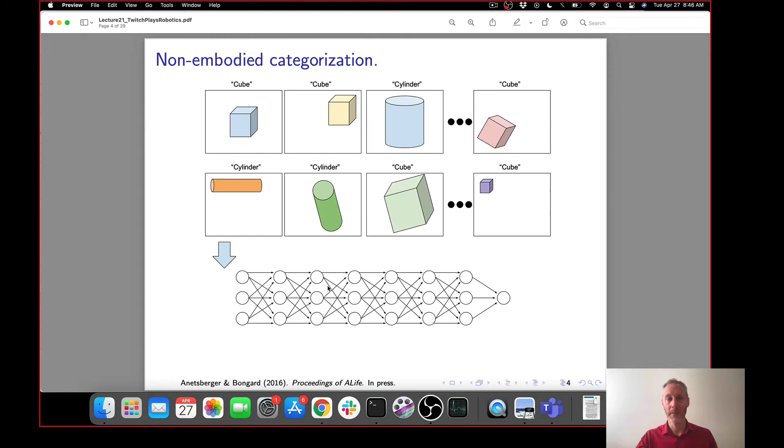Nobody knows, and this is another reason why this lecture is included in the open challenges in robotics. I'm going to skip over a couple slides here. How do we go about solving the symbol grounding problem? Well, there are hints, a growing number of hints, coming from our understanding of how humans ground the symbols of language in our everyday experience.

We do not learn language by reading dictionaries of dictionaries. However we go about learning language, there is some deep connection between the language we're learning and its relationship with the real world. But what is that relationship exactly? Let me show you some hints that suggest what that relationship between language and physical experience is.

I think we mentioned the motor strip before. Can someone just type into chat, yes or no? Did we talk about the motor homunculus here, the motor strip? I talk about it from time to time in lecture. I don't remember if we've talked about it here. Does anybody remember a discussion about the motor strip?

I don't see anything in chat, so I'm going to assume we haven't talked about the motor strip before. The part of your brain that would be covered if you're wearing earmuffs, right across here, is known as the motor strip.

It's very interesting. If you put someone in an fMRI scanner and focus the scan on this part of the brain, then touch someone's index finger, a particular part of the motor strip will light up. If you touch a nearby body part like the middle finger, a nearby part of the motor strip will light up. If you start by touching parts of the subject's body from the head down to their toes as they're in the scanner, you will notice a series of lights lighting up along the motor strip.

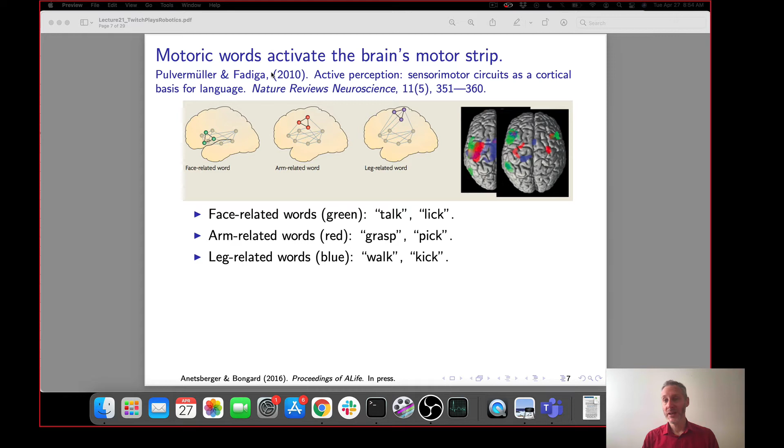This is something we're just starting to learn more about in neuroscience. I'm sure there's lots more of the story to be learned.

Let's jump to another literature, which is the literature of linguistics. For those of you interested in language and linguistics, I cannot recommend George Lakoff enough. He's written a number of wonderful books about the nature of language, and specifically embodied language. We've talked about embodied cognition in this course quite a bit. What is the relationship between language and the body? George has a wonderful book, he's got many wonderful books. My favorite is Metaphors We Live By.

Metaphors, like don't jump to conclusions or don't look back in anger, these are aspects of language that seem very abstract. Metaphor is one of the more abstract parts of language, it seems. But certain metaphors are what Professor Lakoff refers to as embodied metaphors, and you can see why. I've picked two metaphors from the English language here, and each has motoric words hidden inside of them. Jump, for most of us, makes you aware of your legs.

Looking back is an interesting one. What is it about looking back? Don't look back in anger - what does this metaphor mean? If you look back over your shoulder, obviously you don't see your anger behind you. What does it mean? What's the meaning of this metaphor? If you have an idea, you can type it into chat, or unmute yourself and offer an opinion, that's fine too.

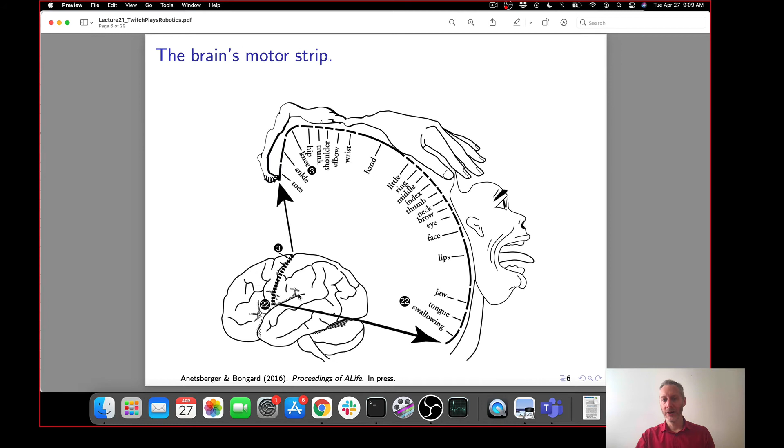It's interesting to think about how far we could push this process. If a robot can ground jump in felt experience and movement in jump, could a robot understand political movement as a type of movement? Could it understand socialism as a type of political movement? Seems difficult. Let's take not socialism, but a different word, capitalism... let's go with democracy. Democracy seems like a very non-motoric word, very abstract.

However, thinking about thinking is misleading, as always. If you think about the word democracy, there is a motoric association you can imagine, a way you might be able to ground the word democracy, not just in these abstract words, but in felt experience itself. What is the felt experience of democracy? Seems almost like an oxymoron, can't be true. What does democracy sometimes feel like? Any ideas?

There's a lot going on in this video, so I'll play it a couple times. You can see the video stream on the left, and you can see on the right, at this particular time, we had about 30 viewers, and they were all talking to the robot. We'll talk about the chat in a moment.

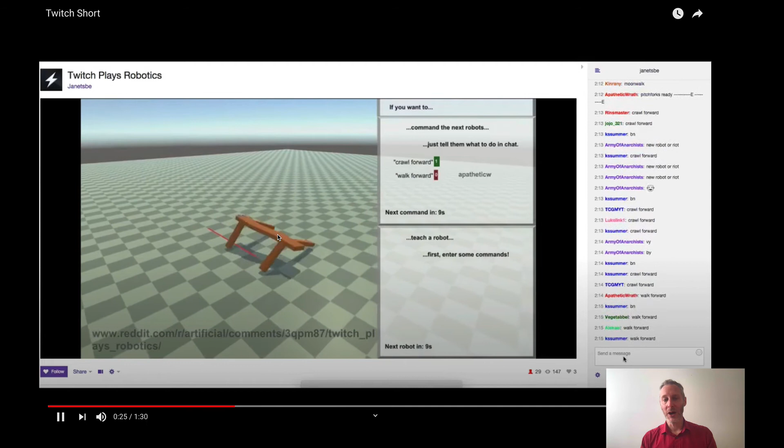As I mentioned, each time we run this, we have a different virtual robot, and it's being controlled by a different random controller. In a moment here, we're just going to skip ahead here a little bit.

Okay, every once in a while, we tell the crowd that we have just told the robot walk forward. We tell the crowd to think of these robots as pets. They don't understand English, but they may be able to respond to a small set of commands, but we don't know what those commands are. And it's the Twitch crowd's job to teach these robots language. So in essence, we're going to try and recruit the crowd to help this robot ground various symbols. The crowd can do this in two different ways. The crowd can propose which symbols to ground, which motoric words should we try and teach this robot. And then once we do, we're going to help them understand the relationship between that symbol or that word and the robot's own felt experience.

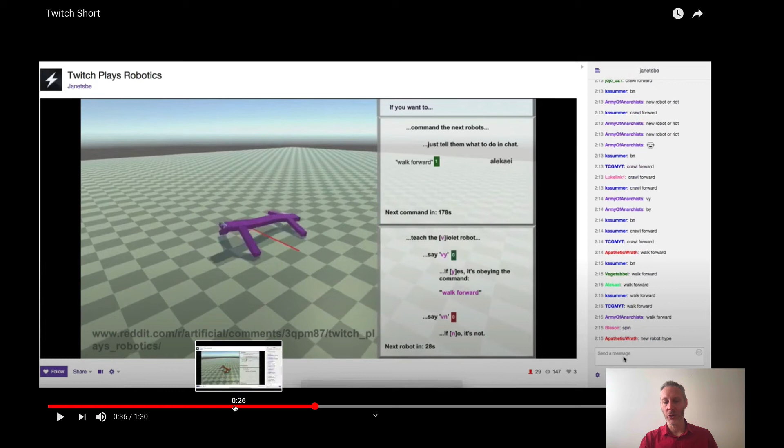At this particular point in time, the crowd has typed in walk forward a bunch of times, as you can see on the right here. So this is the crowd voting for the word that they want to try and teach the robot next. Every 5 minutes, we switch what the crowd can teach the robot. If you look in the top right here, you'll notice people voting for different commands. We don't make the commands as the investigators. It's up to the users to decide which motoric words, which commands they think they can teach the robot.

And you'll notice that the votes for walk forward are winning at this point. And so in a moment, the command WALK FORWARD is going to be issued to the robot.

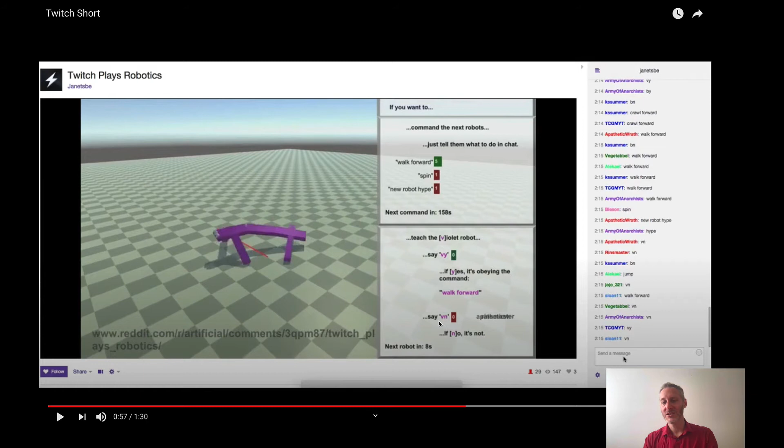So here we go. The violet robot is now hearing the term walk forward. Now the second task of the crowd is to tell the robot whether it is obeying this command or not. Type into chat VY if yes, the violet robot is walking forward. If you do not think the violet robot is walking forward, type in VN, violet robot no, I don't think you're walking forward.

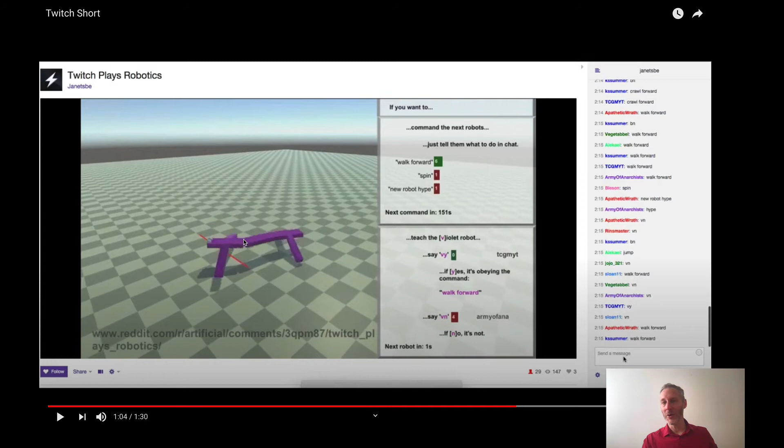You'll notice 2 people just voted no, that the violet robot is not walking forward. 4 votes, the violet robot is not walking forward. So at the previous moment, we had 4 votes that this violet robot is not walking forward, and 0 votes that the violet robot is walking forward.

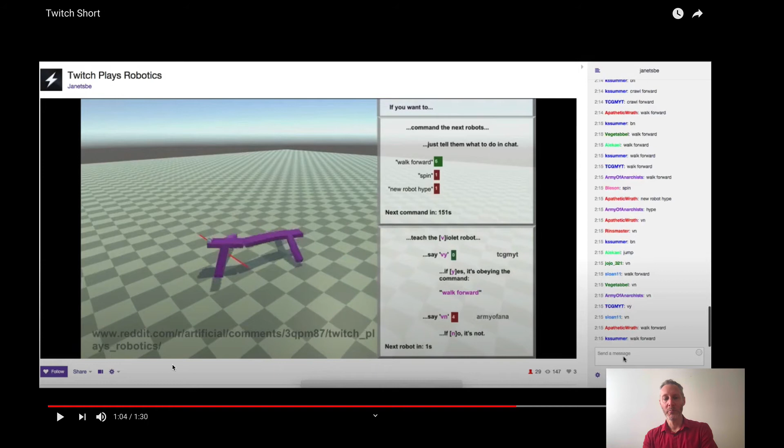You're going to see the next robot is the blue robot. I want you to type in BY. We're going to actually play Twitch Plays Robotics here for a moment. In Teams chat, type in BY if you think the blue robot is walking forward, or BN if you think the blue robot is not walking forward.

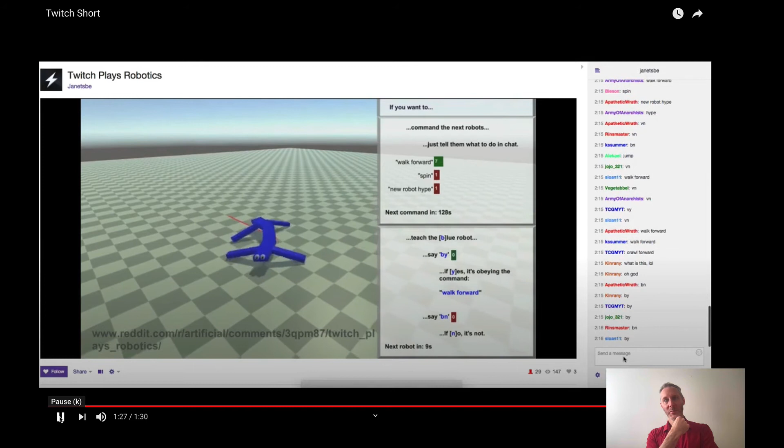One vote BN, one vote BY, one vote BY, BY, BY, BN, BY, BY, BY, BY.

Okay. All right. So at this moment in time, I'm not going to count it up, but we've got quite a few votes here. I think it looks kind of split. Maybe a couple more votes. Oh, maybe it's split. Half say yes, half say no.

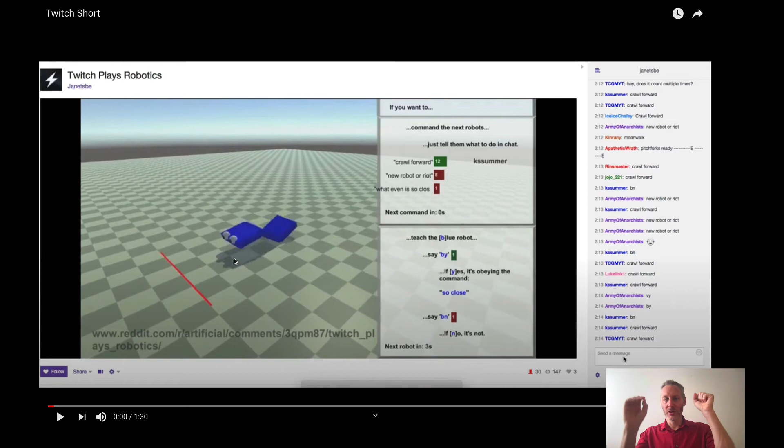Okay, so we now have one data point, which is for this particular robot, the blue robot, which has one random controller. We have the symbol walk forward, and associated with that command is a bunch of yes votes and no votes. So we played this task over and over again, and over the course of a few weeks, we had hundreds of people label thousands of random controllers for hundreds of different commands.

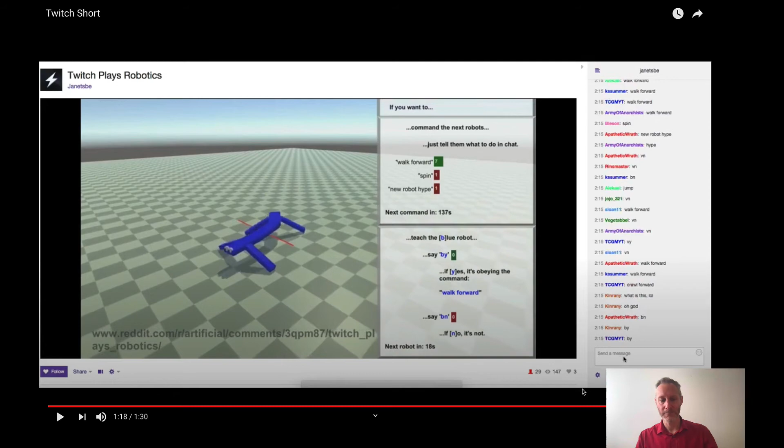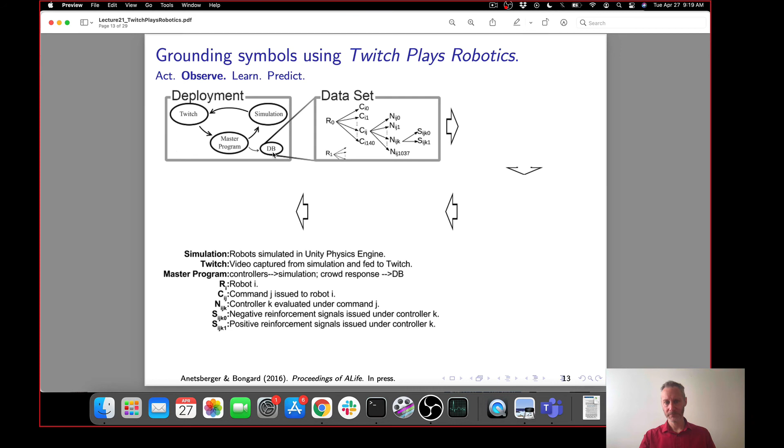Okay, so this is the act part of the process where we're generating a large data set, which is being stored in a database. What does this data set look like? You just generated some data, so hopefully you start to have an intuition for what this data set looks like.

In this particular project, we actually used two different robots, which you probably noticed in the video. There was the quadruped robot, and then there was the simple worm robot. So R0 is the worm, R1 is the quadruped. So R sub I is going to represent the ith robot. I equals 0 is the worm, I equals 1 is the quadruped.

For each of these robots, the crowd generated multiple commands: walk forward, spin, stay still, and so on. Each of these commands is going to be represented with two subscripts, I and J. So C sub ij represents the jth command issued to the ith robot. So C03 is going to represent the third command sent to the 0th robot.

Okay. For each of these commands, and these commands were issued multiple times so the crowd can vote, they sent walk forward to the robot once. Later, they sent walk forward to the robot again. So each of these commands, every time this command was issued, there'd be a different random controller running on the robot. So we're going to represent the controller with an N.

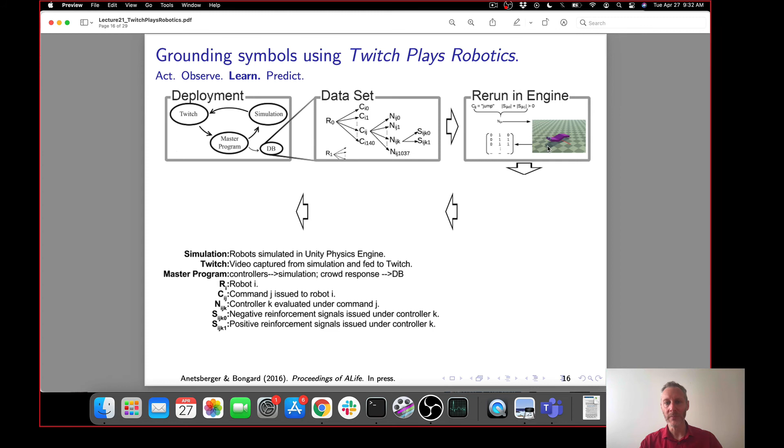Kind of interesting. Okay, so now we're going to see, given this data set, can we get the robots to actually learn anything? Can the robots discover a relationship between a given symbol issued by the crowd and the robot's own felt experience? I mentioned that the robots were run using a random controller.

So what we did was replay a subset of the controllers, but in this case we're going to record sensory information. We're going to record the robot's felt experience and see if there's a relationship between that felt experience and the command. We focused on just one command, one of the C's, which was jump. Jump was issued 385 times. So we took all of the controllers that were executed on the robot while the crowd had issued the command jump. We're just going to focus on seeing whether we can find a relationship between sensor values and jump. Okay, how did we do this?

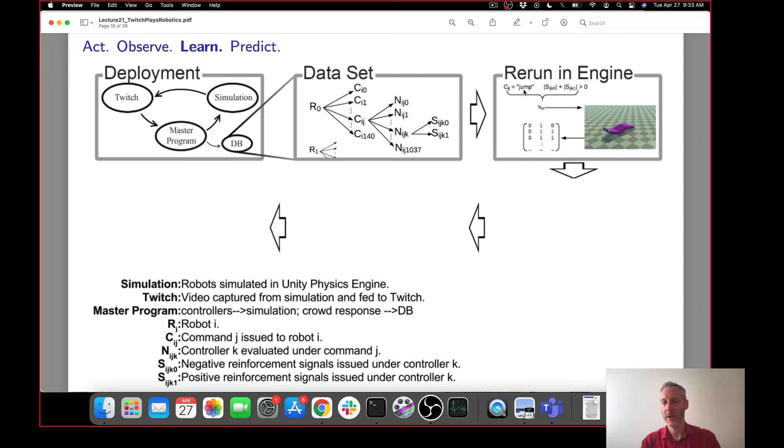You'll see here in this case we have the simple worm. The worm is made up of just 3 pieces, 1, 2, 3. We put 3 touch sensors in this robot, in each of the 3 links that make up the robot. We replayed the first random controller issued to the robot under the command jump, and we recorded sensory information generated by that random controller, and we placed it in a 3 by n matrix. Each row corresponds to 1 time step in the simulator. In this example, the random controller caused the middle link to be in contact with the ground, and the front and back link were off the ground. So this first row corresponds to the values of the 3 touch sensors in the first time step, here's the second time step, third time step, and so on.

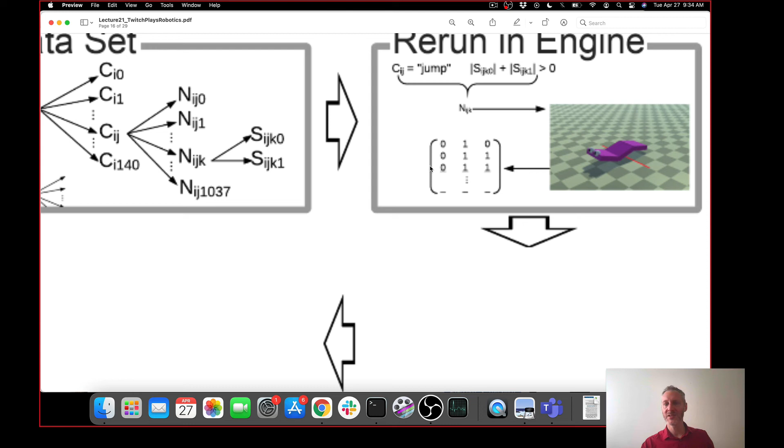So we now have jump. We now have a matrix which represents the sensory information. We did that for all of the random controllers issued under the command jump. And then among that set of random controllers, we reduced that set to just the ones in which the sum of the two S's was greater than 0. What I mean by that is we recorded just those random controllers in which people typed at least one reinforcement signal, at least one yes or one no, into chat while that random controller was controlling the robot. So far, so good? Okay.

So here's one of these random controllers issued on the robot under the command jump. We now have a matrix T, which is all the touch information. And remember, we also have associated with this random controller S0 and S1, the total number of yes votes, S1, and the total number of no votes, S0.

We're going to take these two values and normalize them into a new value O, which is the crowd response. This value O is going to range between -1 and +1. An O of -1 means there was unanimous negative reinforcement of that controller. An O of 0 means half yeses, half nos. And an O of 1 represents unanimous positive reinforcement.

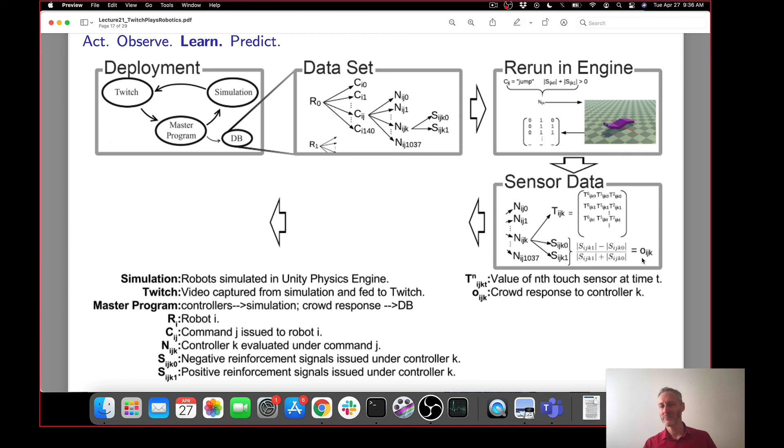So you all typed in about an equal number of BN and BY. So that particular controller that you were voting on probably would have got an O near 0. So far, so good? Okay.